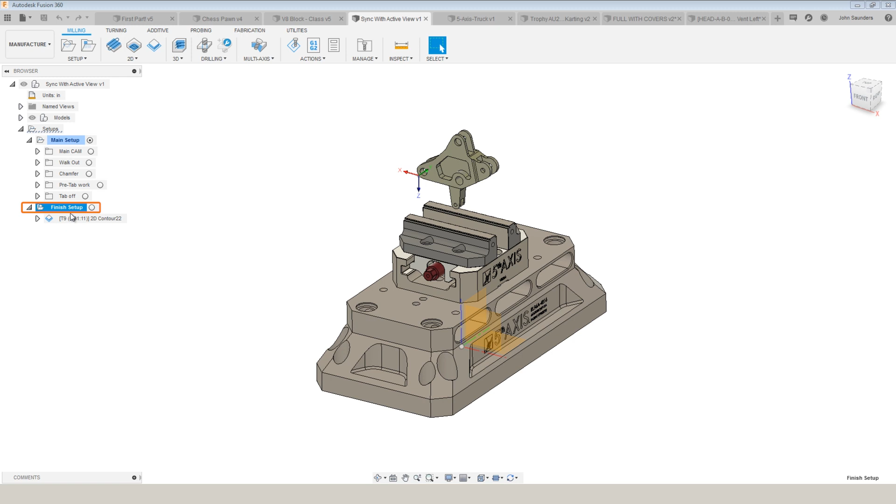Enjoy. First new feature at the bottom of your screen in the manufacture workspace is a new icon, Synchronize Active Setup. I've got both of these options checked: Sync View with Active Setup and Sync Visibility with Active Setup. What that does is when I switch my main setup to this alternate setup where I'm Op2-ing the part, and oftentimes you're inverting your Z-axis because you're holding it from the exact opposite direction. Watch what happens. Hit Activate.

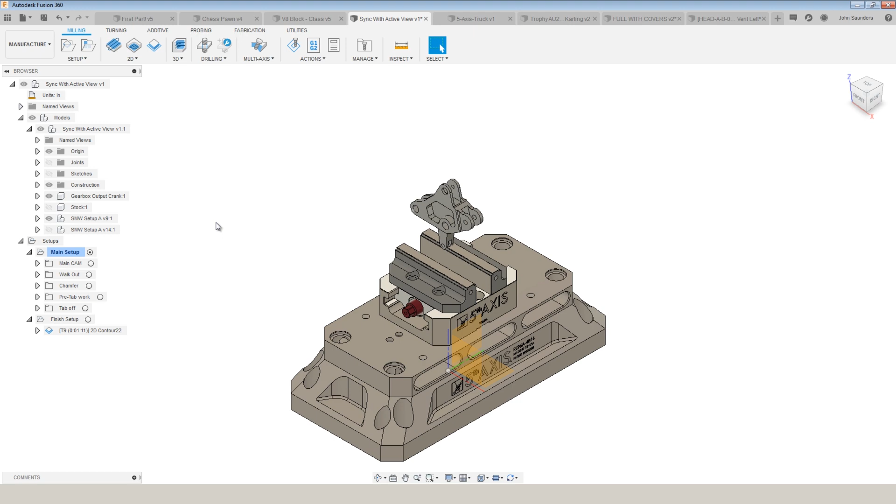It flips the part around so it's oriented now with my Z up in that ISO view, and it has toggled the visibility to show my Op2 work holding. If I toggle back to the main setup, it goes back to there. Absolutely awesome. This is a nice quality of life improvement when it comes to either switching between Op1 and Op2 type setups, or if you've got a part that you're moving through, say turning, then over to milling or machining.

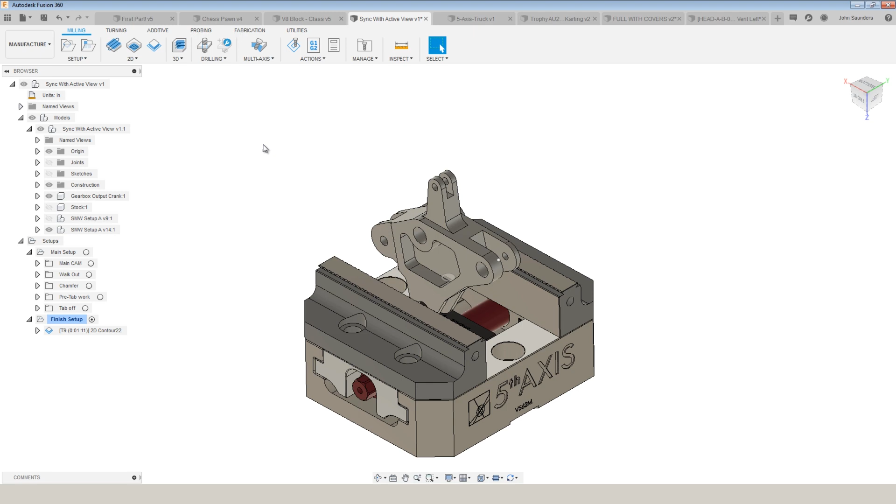Rob's class also covered a really innovative way of handling your Fusion 360 templates, but not the templates you're thinking of, in overall setups. Let's first walk through how we've handled our 5-axis setups, then I'm going to show you Rob's, and we're going to kind of compare and contrast them. So let's say I want to machine this part.

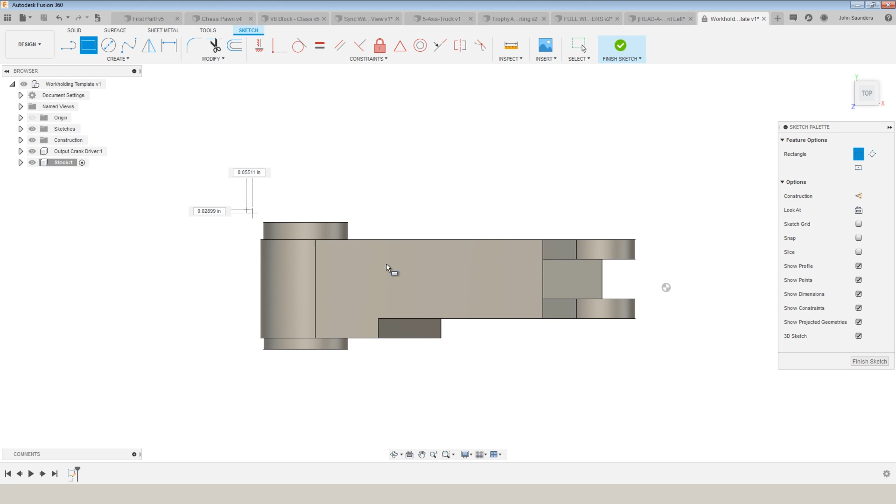First thing I'm going to do is new component, stock, R for rectangle. We'll sketch a rectangle on this face, and I would probably take more time to dimension it such that it matches stock that we have on hand. I'll extrude it up, and then I'll switch the direction to two sides. I'll extrude it down. I click OK, and what I can now do is change the opacity to 30%. This lets me see how the part is sitting inside the stock.

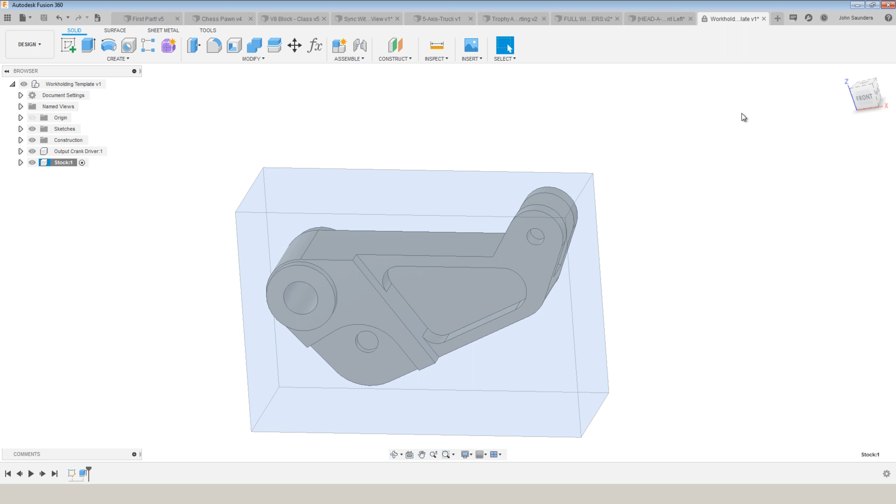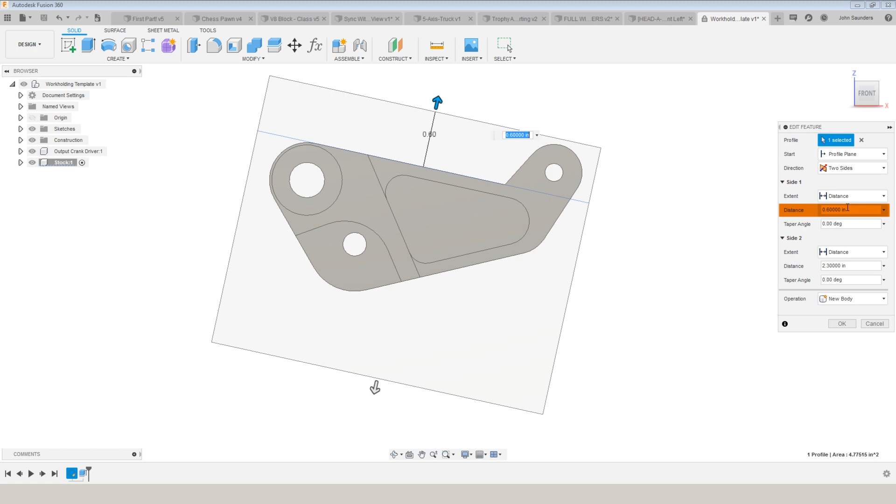And on most 5-axis workflows, especially for one-off parts, you'll benefit from having an additional amount of stock below the part so that you can tab it off and have an ample clearance below your vise. So let's say drag this down a little bit more, and we really don't need very much material up there. So you can see I'm only able to drag it in 0.1 inch increments. So by dragging it, I can see which dimension it is, and I can either type in the dimension, or if you zoom in, Fusion actually is zoom aware. So as you zoom in, it gives you finer adjustment ranges. So 0.55 is perfect for there.

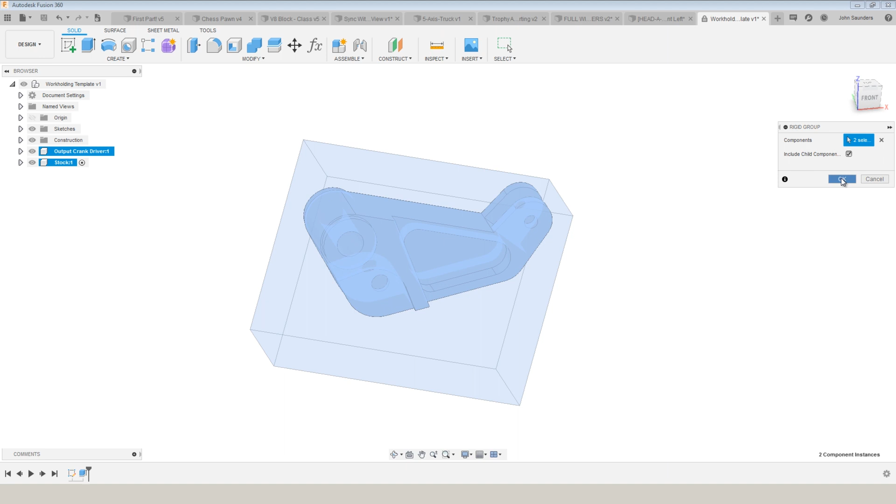Click OK. We have our part, we have our stock. I want to lock them together. Assemble, rigid group. I'll pick the component and the stock, click OK. So those now move together. I then go into our work holding folder. Make sure I'm active on my top component. I'll pick whichever setup that we have. This will be our standard smaller self-centering vise.

Insert into design. We've got these files available over on the NYC CNC website.

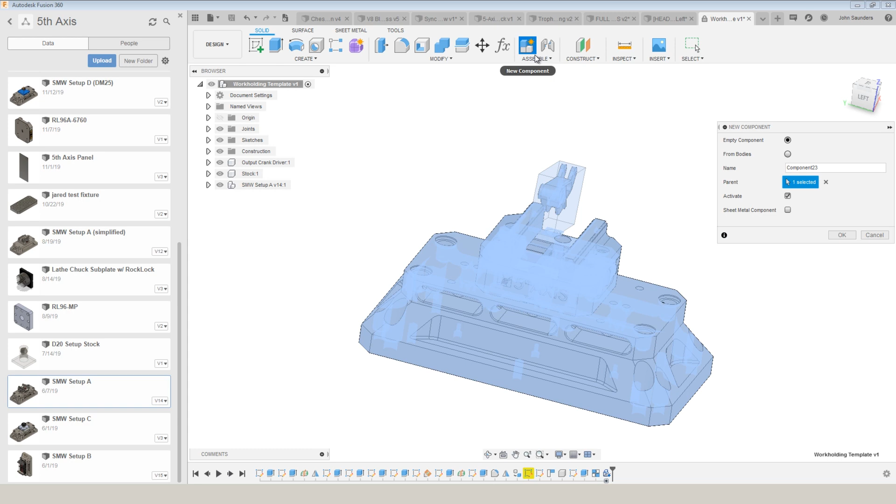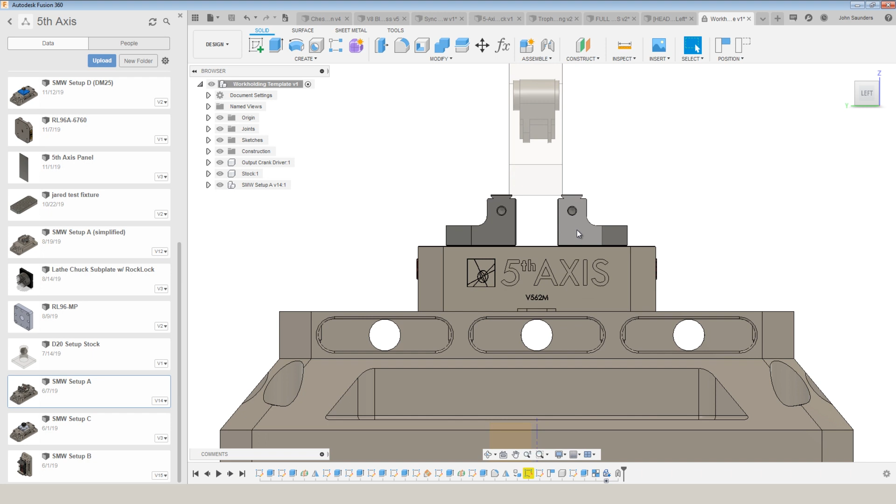Just click OK. Assemble, as-built joint. I want to join the bottom of my 5th-axis base to the origin of my Fusion model. Click OK. Think of that like a ground. I'm locking this base at the center of my global coordinate system, and having it grounded lets us move the jaws in and out. If I hadn't grounded it, when I try to move the jaws, I'm just going to drag the whole part around.

J for joint, and I'm going to then select the origin coin at the bottom of my stock and that joint origin that we have at the center of our self-centering vise. Click OK.

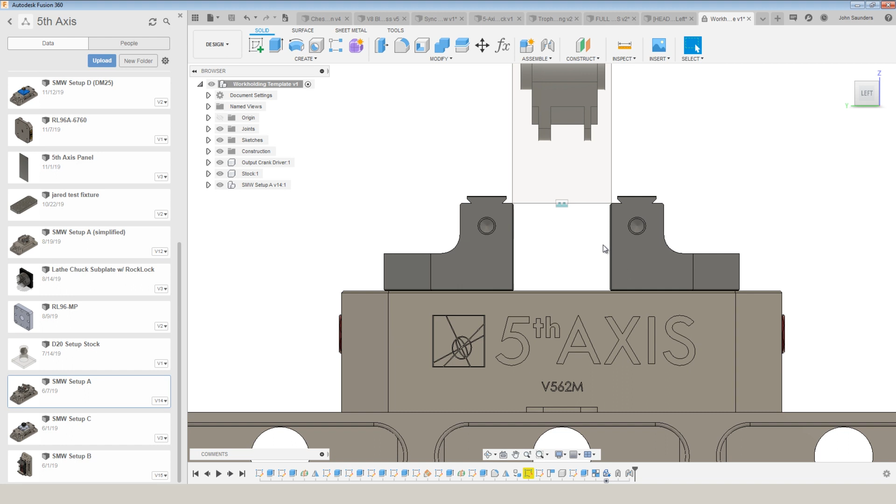Drag my jaws in. I just do this part by eyeball. And for the first time in the history of using Fusion 360, I actually care about capturing the position. And I now have my part held exactly where I want it at a known location. I could take advantage of the fact that this is a zero-point system, so I wouldn't even have to probe if I didn't want to. And I've got everything ready to go, and I can even use this to check my holder collisions with my part.

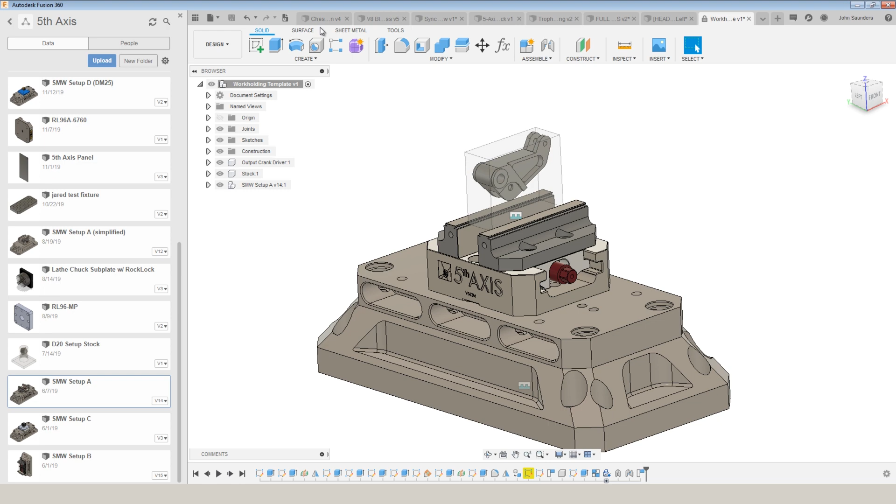Rob's method is totally different than that, and I actually really like it. His demonstration was on a 5-axis part. I'm actually integrating it already with our lathe workflows for our new ST20Y. So we have a lathe master template. And if I open up that template, it has our Royal chuck, it has a piece of stock and it has a part placeholder component. This is key. I'll explain in a second.

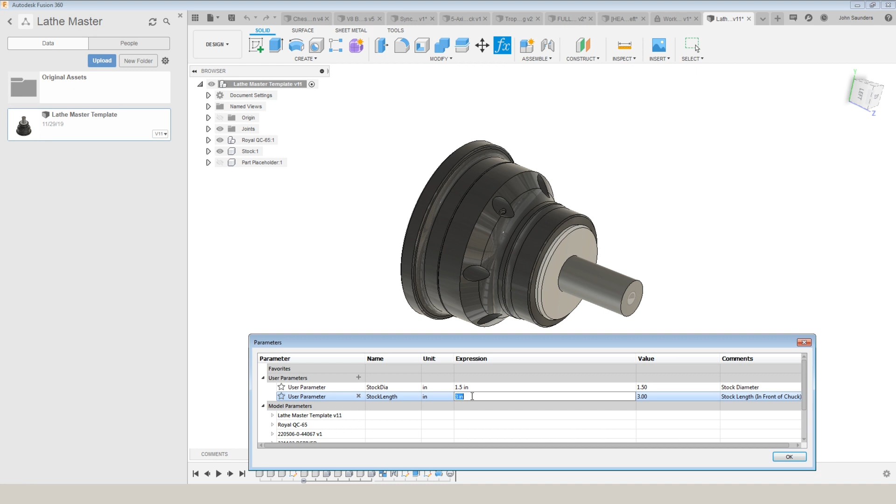Under modify, change parameters. See how that's the FX? I chose to pin that to the toolbar so that it stays up here because I use it a lot now. We've got the two variables I care about. In this case, the stock diameter, so let's adjust that to say 1.5, and the stock length, that's how far it's sticking outside of the collet. So 3 I think worked for this example.

We also have, under manufacture space, pre-programmed CAM. And this is the key to this workflow. And I give Rob a lot of credit for coming up with this.

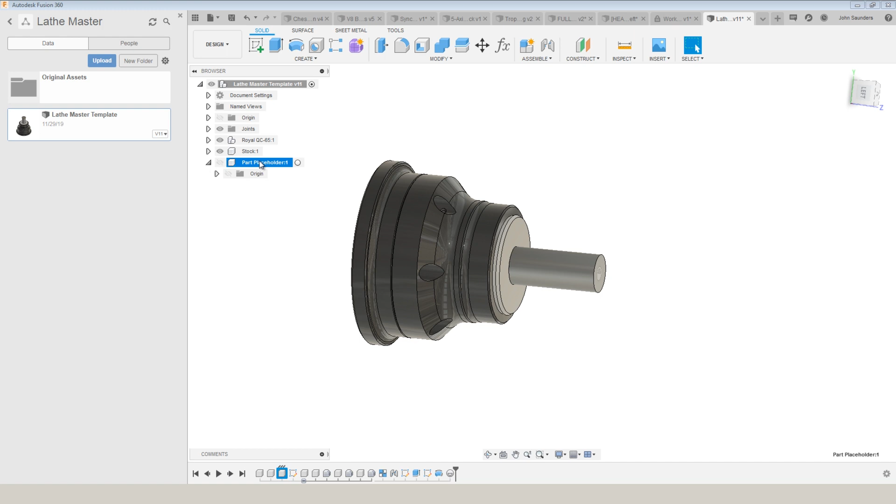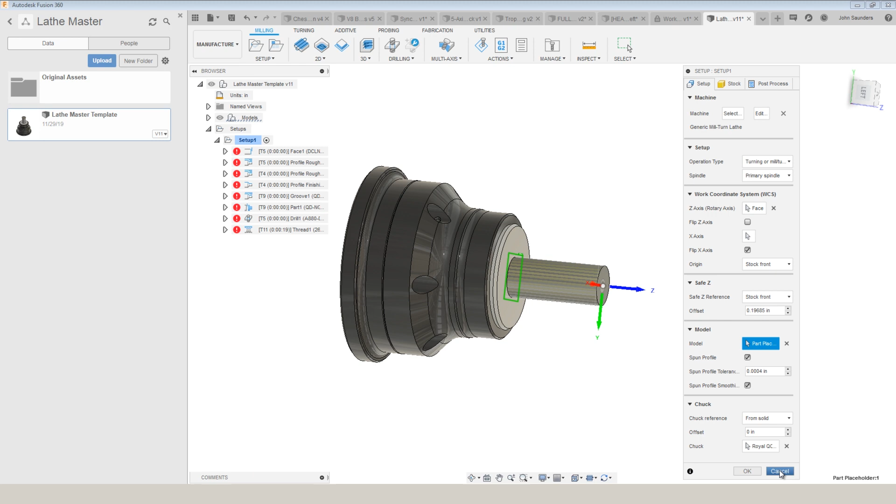I'm going to reiterate that point to make sure it sinks in. We create a component called part placeholder. We then choose that part placeholder component in our CAM setup as the model. What that means is that anything that we put inside of that component or as a subcomponent automatically becomes part of the CAM setup model. If we didn't do this, we'd have to be constantly deleting and adding new top level components, and we'd thus have to go into our CAM setup and be re-picking the model component each time.

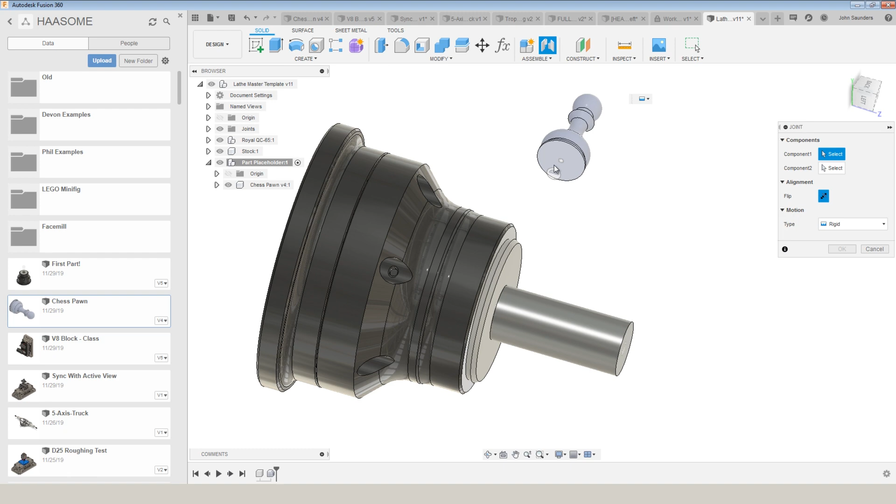I'll give you an example. Let's say we want to machine this chess pawn. Under design, I'm going to activate my part placeholder component, right click, insert, hit J for joint. Normally I'd like to grab the tip of the part. I don't have a good joint origin. That's okay, I'll use the rear end of it. Because now I can just drag it back to show it there. I set my stock opacity to 30 so I can see it.

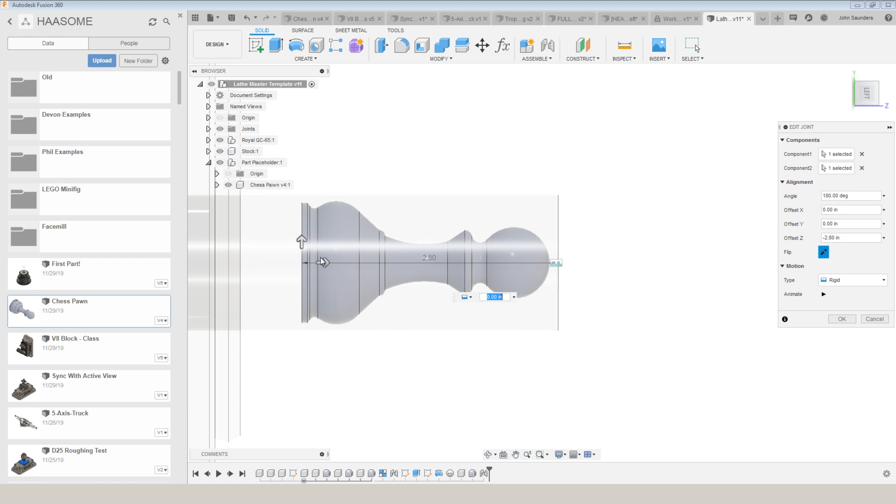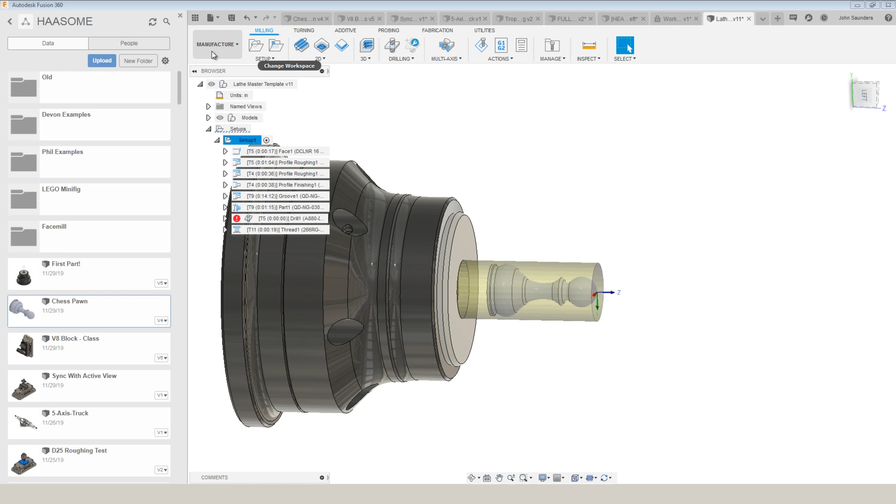I can go back and edit that joint, move it forward just so we have enough to skim off the top. Click OK. If we needed to change our stock size or stick out here, we could. Go into manufacture, right click, generate toolpath. Turning is actually a great example for this workflow because most of the turning CAM in Fusion 360 is model aware.

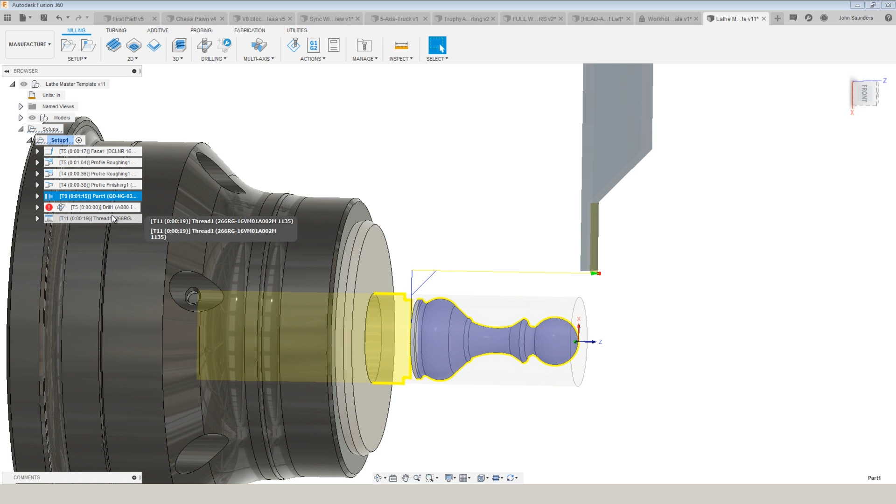I've already got my facing operation. I've got my roughing. I've got my roughing with a V insert. I've got my finishing. Grooving, I probably won't need. I don't have that selected as rest machining right now. We're still working on our master CAM template, but I won't need grooving here, so I can just delete it. Parting is good to go. I'm not using a drill and I'm not threading on this part. I am potentially done. And again, once we nail down our tooling and our feeds and speeds for our lathe, we can have this master template that works great, especially on these simple 2-axis lathe parts.

Speaking of 5-axis workflows, Phil Buttersworth did an amazing class on showing how to program 5-axis parts very quickly.

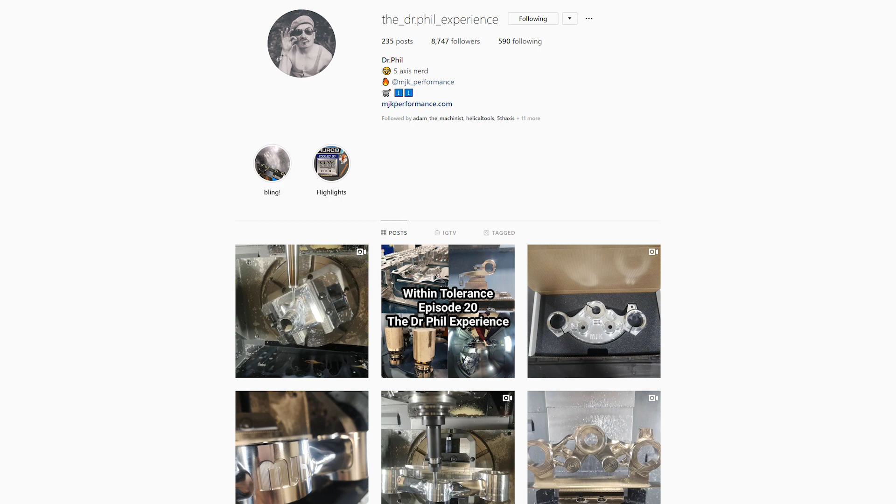Like, part shows up and within 2 to 3 hours, you're holding the finished machine part in your hand. So he asked for a sample part off of the Johnny 5, and I thought, you know what? I'd love to see how Phil would tackle this part right here. It's a fairly complicated part that will definitely benefit from a 5-axis workflow.

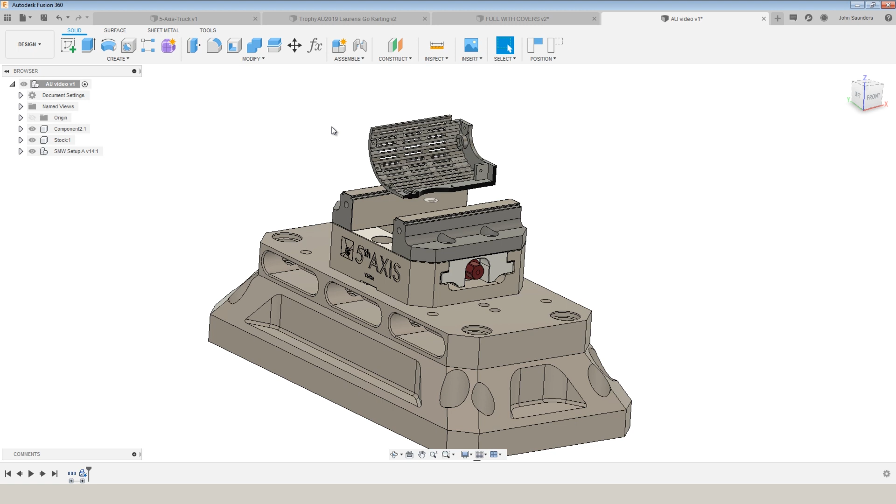Here's what blew me away: when I was thinking about machining this part, I was thinking about the traditional setups. The stock that we're starting with is almost certainly going to be 4-sided. So I'm sitting here thinking, do I hold it like this? Or should I rotate it up and hold it like this? When I hold it like that, I may not be able to have great access to get to some of these features down here on the floor, depending on where I'm trying to reach in. But if I had gone the other way, it's not ideal.

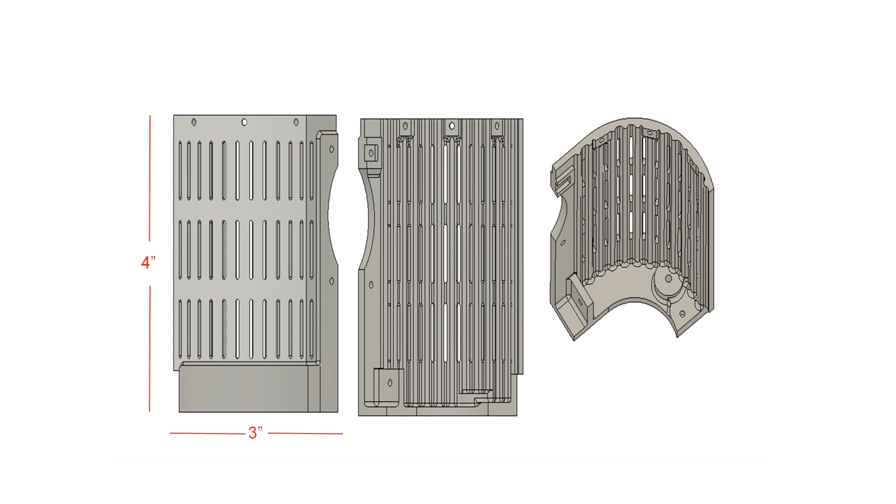And the light bulb moment in Phil's class was when I realized you don't have to hold it in a traditional 90-degree angle. What Phil recommended was rotating it up about 45 degrees, like you see here, which is going to give us the right mix to get access to all the features that we need to, including, critically, this bottom feature here with the curve, which is the most soft jaw friendly, because we still need an Op2. It's not very much work in Op2, but we want a good datum and a way to hold that.

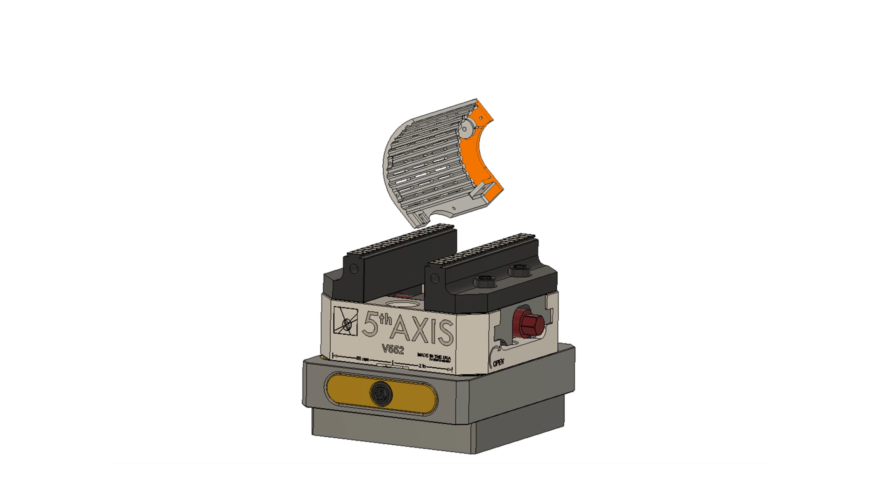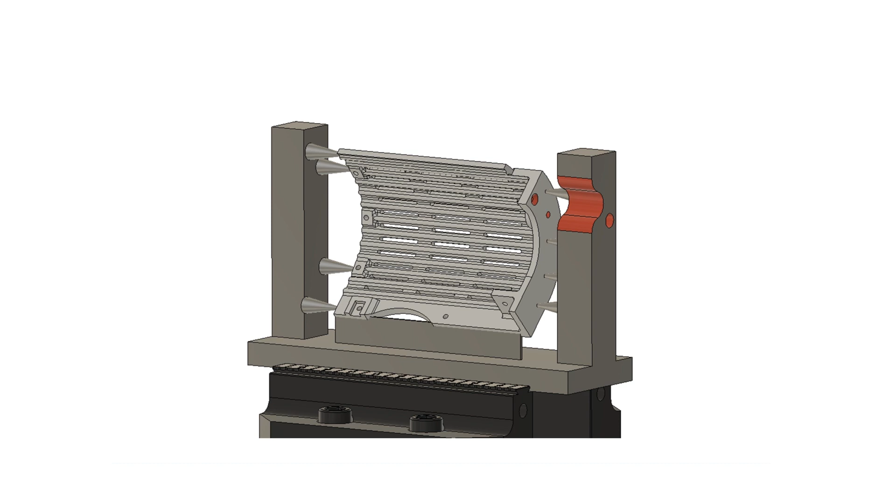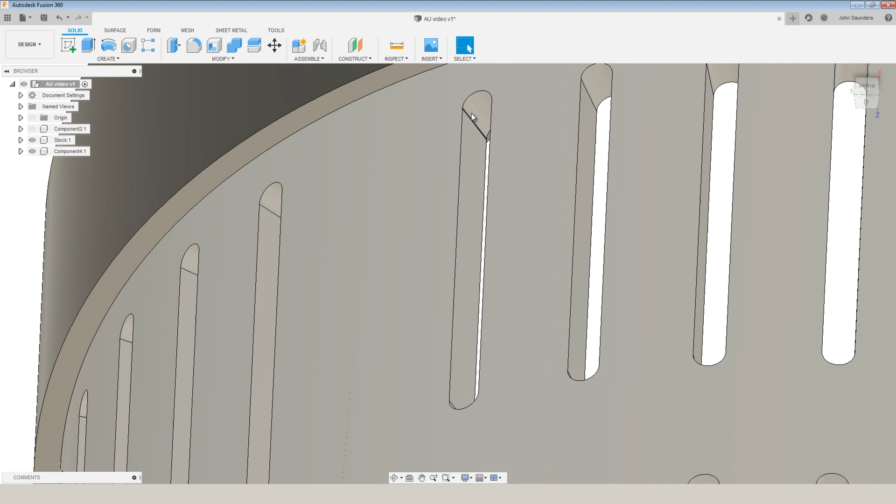I forgot to mention, let's say you're going to surface this outside edge. You don't want all these slots here. It's going to just wreak havoc on your toolpath. There's a couple different ways we could tackle this. We could copy and paste new, and we could go into this new component and we could start using direct modeling features to go through and individually delete each insert. Fusion Direct Modeling is actually really quite powerful, and this is a really good outcome, but it's a horrible way to get there because it's incredibly tedious.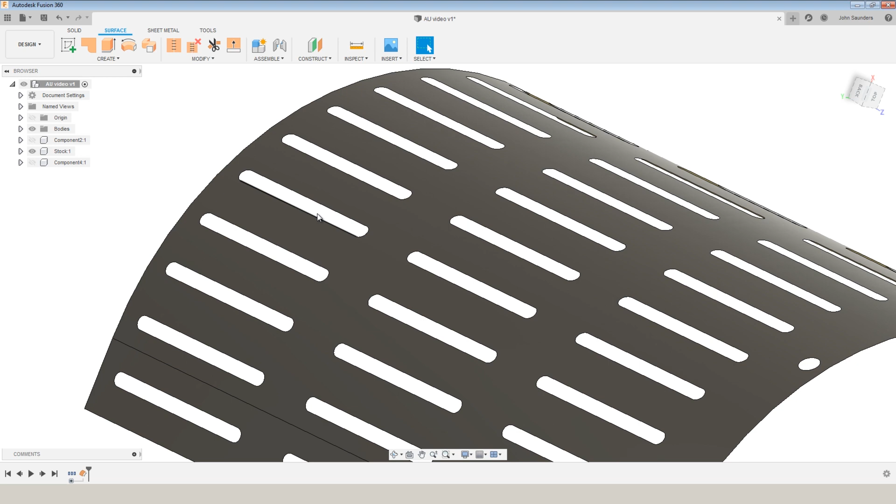And it's the same shortcoming if you went into the surface environment and you did a create offset patch, you selected that face, and you did a zero distance offset. It's a really common workflow. Here we've created that skin or that patch that we can use, but I've still got to go through and take the time to get rid of each one of these slots.

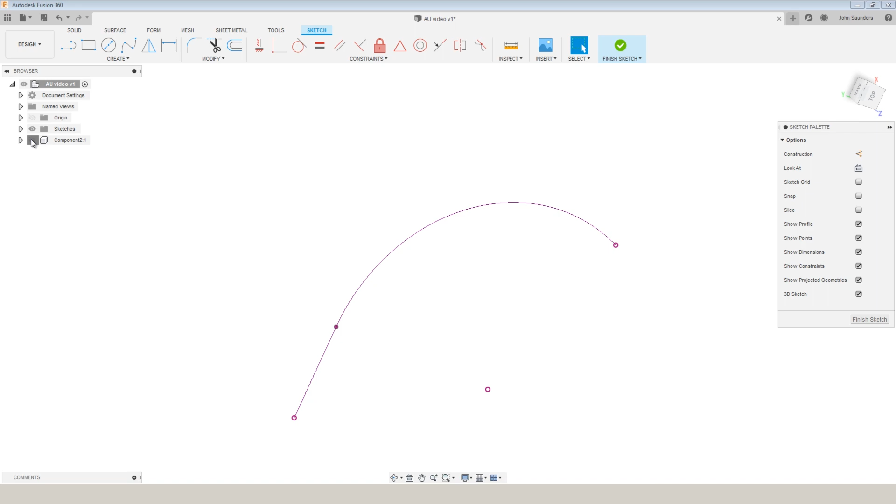The better way: create sketch on this face, P for project. Now I'm going to project those two edges. If I turn off my component visibility, you can see I've got those two purple edges, and then create extrude to object, extrude to that point right there, click OK. I've now created something much simpler. We can then do create offset, and we can select these with zero distance offsets, click OK. And you can do additional trimming work as needed, but it's a much more enjoyable way to create a nice, clean surface to use for those 3-axis toolpaths.

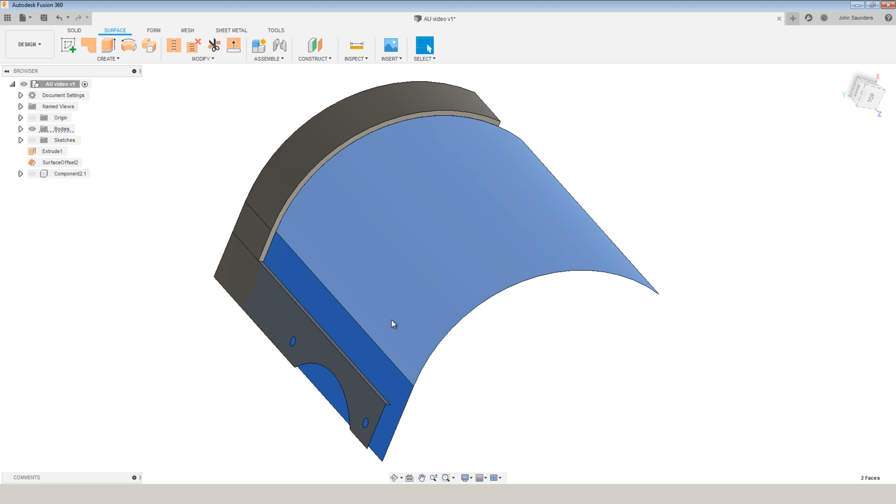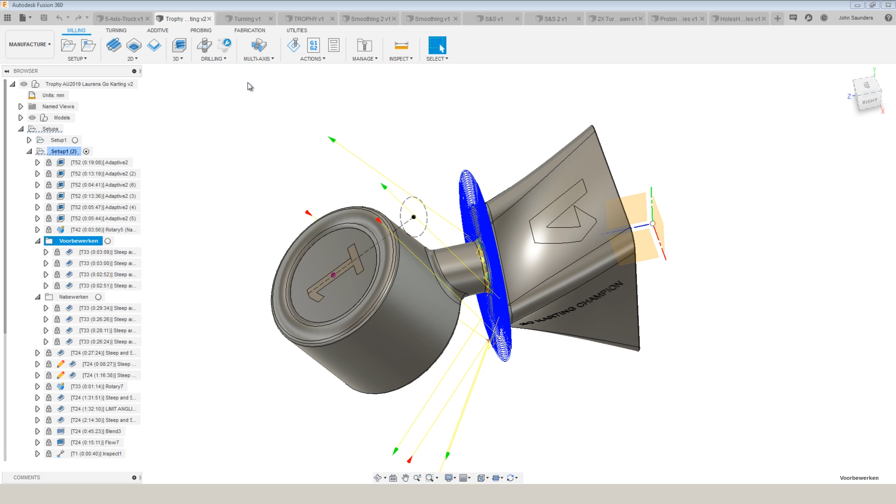Laurens Weinschenk, who you may remember from a really awesome factory tour we did over in the Netherlands, did a class that kind of recapped all the new things that have come about in Fusion 360 since the last Autodesk University, or basically in 2019. NC Programs is a major one. If you've ever gone through a part and thought, well, setup A, I want to post on my ST-20Y, but a different setup or even a different part defaults back to that same machine, and you're thinking, wait a minute here, no, I want that to be on a different style machine or use a different post processor.

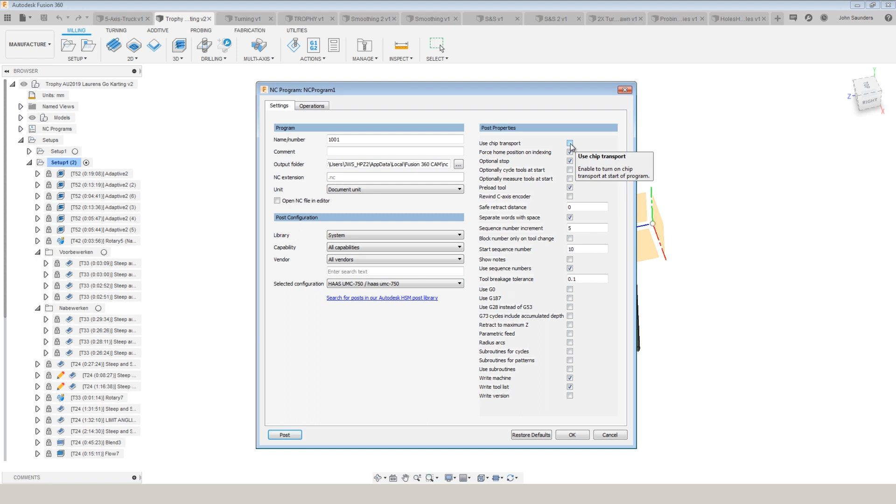More so, there's other things that you'd like to include as defaults. NC Program does that. In this example, we can save the name, we can save where it's going to get saved to, and most importantly, we can choose our default post processor for this file. We can save all of our post processor settings. We can even set different NC programs to post different sections of the code.

So you can have an NC program to run your fixturing. You could have an NC program just to run this certain Op1 setups or just the surfacing setups. You then post from this, and it saves you a lot of right clicks, double checking settings, having to make sure you've got the right post selected.

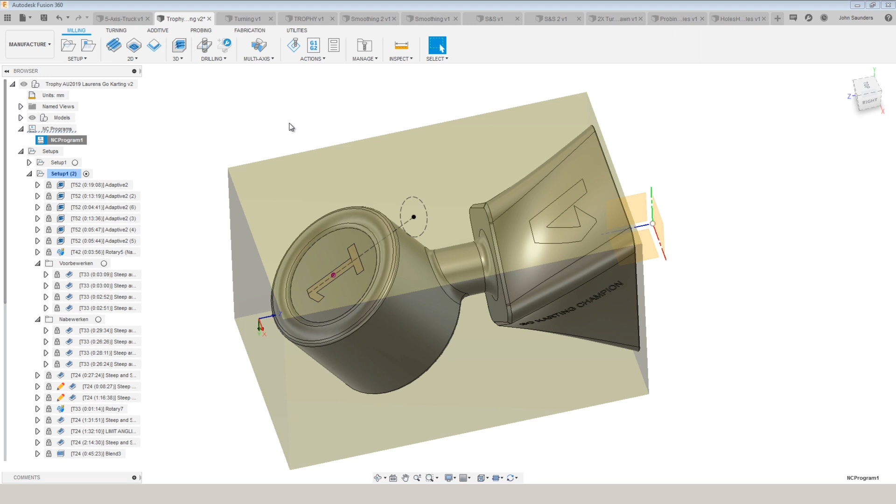Laurens made this gorgeous 5-axis trophy for the AU Go-Karting Challenge winner. Shout out to the New Zealand folks, Scott and Gavin in particular, who delivered some pretty impressive results. More to come on New Zealanders doing crazy things later in this video.

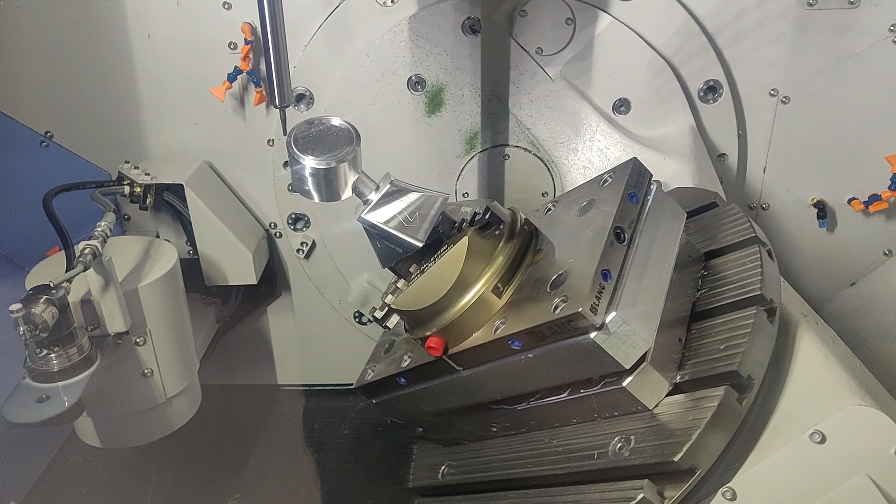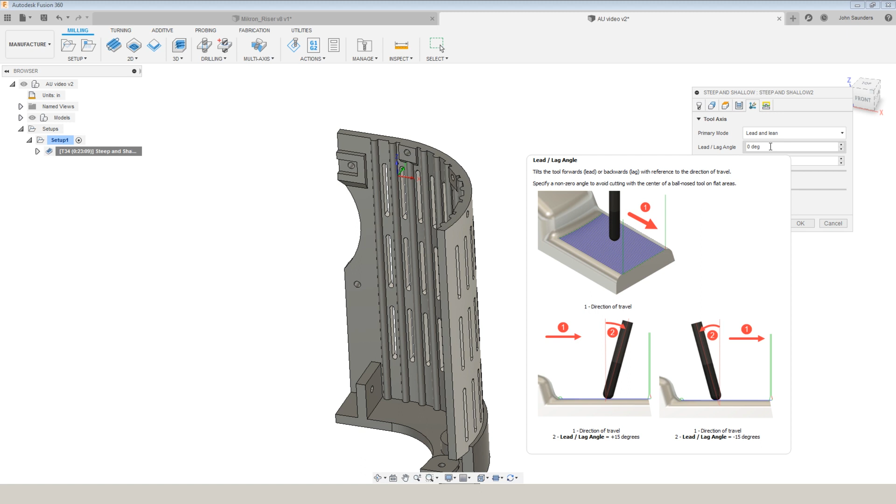It's worth seeing him go into detail about what the settings do between steep and between shallow, and what's really cool is Steep and Shallow offers a multi-axis mode that's going to allow this toolpath to work on 5-axis machines. It's the closest thing yet to a single toolpath that can cover a lot of different geometries and be that kind of holy grail for a lot of toolpaths, at least where a projected toolpath will still work, meaning from a certain view, you can see all the geometry you want to hit.

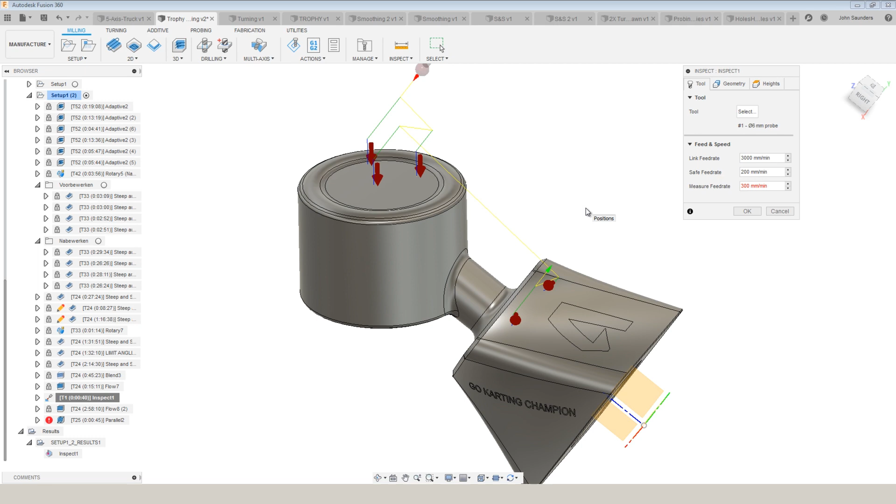The other thing that Laurens covered in his class that was really cool was he showed how we can use the new inspect function under the extensions. So after this part has been machined, he's bringing in his Renishaw probe, and he's picking 5 points. You just pick as many points as you want. He's probing those points. Then the machine can actually output a file. He can bring that back in. And in this case, the green points were in spec, the red were out.

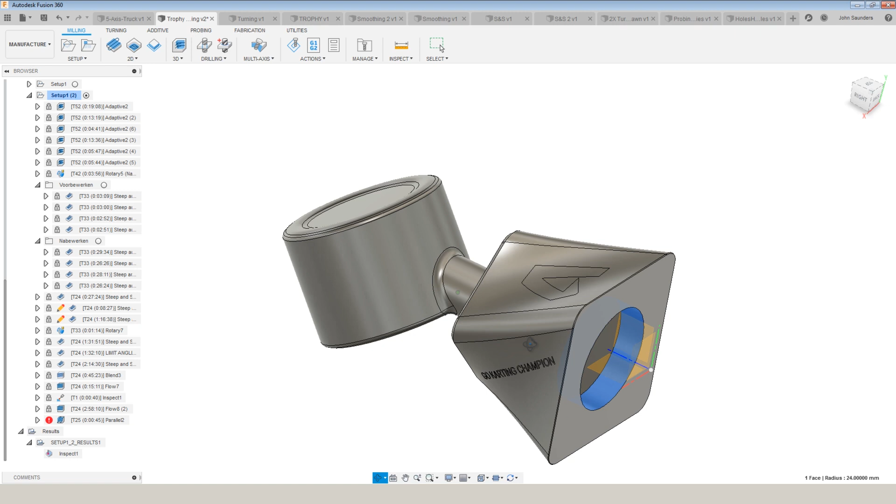He intentionally did this by incorrectly orienting the part on his Op2 fixture in the machine to show what that can do for you. Once that happens, there's some pretty cool things you can do where you can tell Fusion to go ahead and update a tool wear offset to remachine it, or to use logic to say, well, if it's out of spec, run an additional separate toolpath.

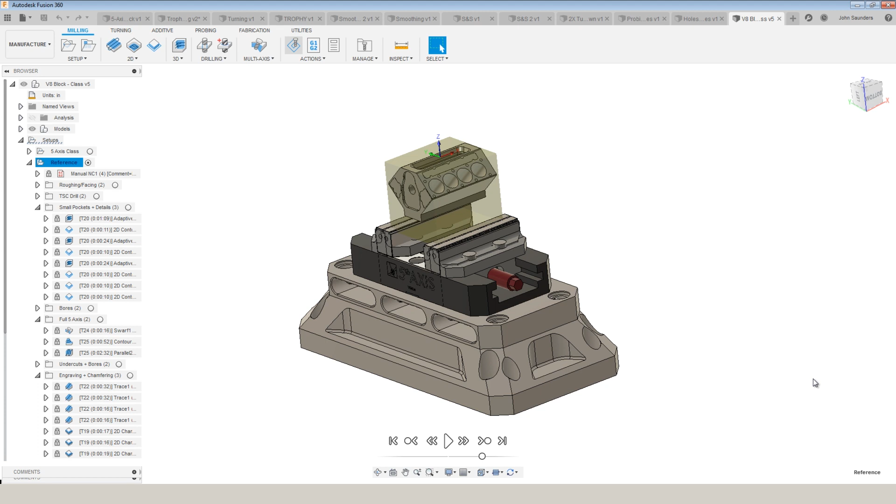Two of my favorite things that I learned about in 2019 were, number one, under the simulation, switch your colorization to comparison and then set the tolerance at whatever tolerance you'd like. This gives you red, green, and blue output to show where you either have stock remaining, which is blue, or red, which would be gouge.

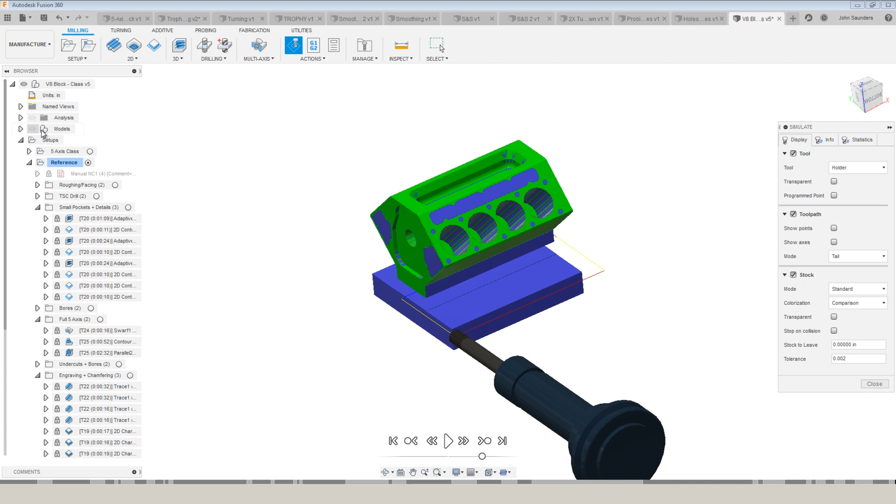If you do this, make sure you at some point toggle off your model visibility, because if you do have a gouge, it will be shown in red, but if you have your solid model still visible, there's a chance that solid model will cover up that red gouge.

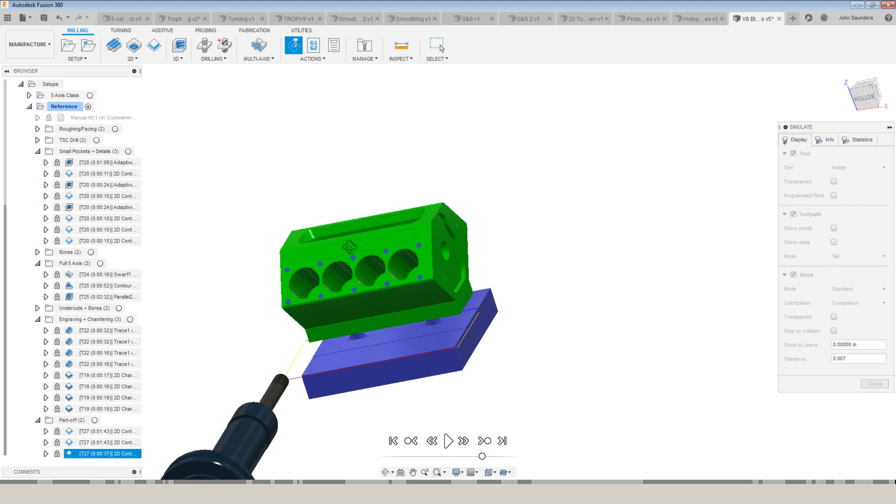It's great for all CAM, but it's really useful for things like 5-axis CAM, where you've got a lot of different setups and orientations, and there's a chance after programming dozens of operations, you might have just missed something, or you've got an incorrect setting in your toolpath. We use this now on every single part we do.

The other feature is under Inspect, Section Analysis. It is awesome for giving you a much clearer view when you're trying to look at certain toolpaths. I'm going to pick this face here, and this doesn't change my file, it just changes my view.

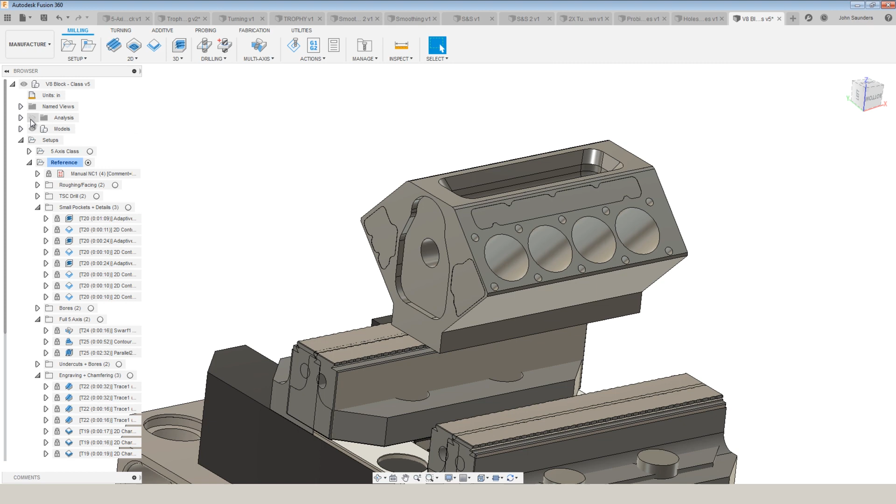And for example, let's say I want to see, turn that back on, I want to see what's happening at the bottom of these cylinders. Well, if I now hop into my bore toolpath, I can get a much better look at how that toolpath is moving and acting at the bottom of that bore, even with my toolpath simulation on.

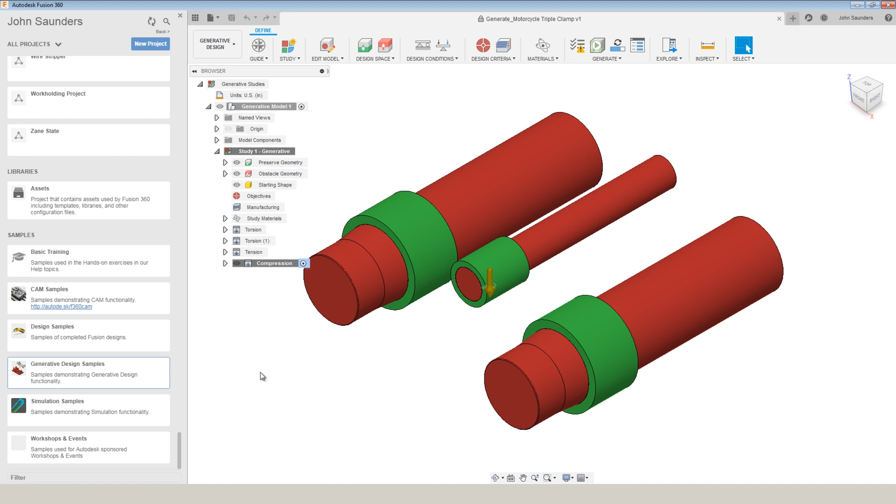Generative design was a huge push at AU, and it's pretty cool. If you've never heard of it, what generative design does is it builds your CAD model for you. That's right, folks. Skynet has arrived. In Fusion 360, you have access to generative design samples, and we've got the motorcycle triple clamp open here.

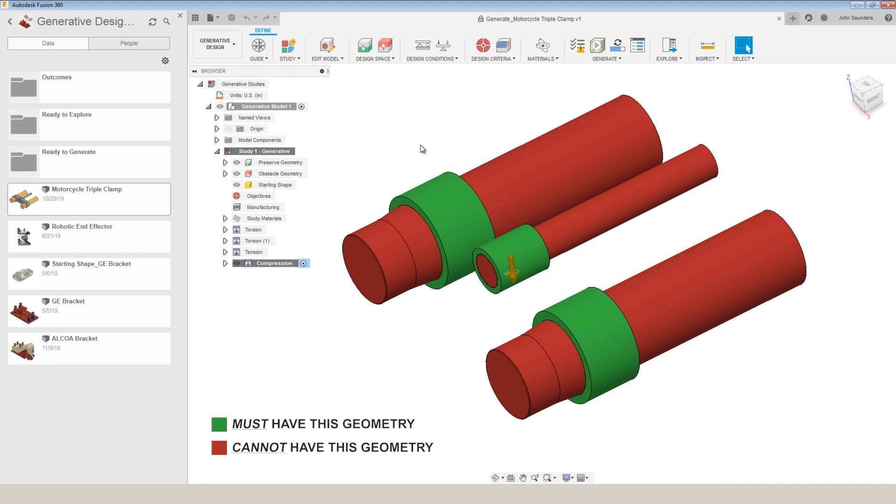What's up with this red and the green? Well, the red represents exclusion zones for the new design. And sometimes that means you've got to extend it so that, for example, it doesn't preclude you from having access as you install the part or service it, say, with a screwdriver or tool. Then the green represents geometry that you absolutely need to have. So here, where our triple tree will actually interface with the motorcycle. So we've got that green geometry they call preserve, the red called obstacle geometry.

You tell it what sort of materials you're going to use, which is really important, because what generative design is doing is it's making use of the strength of those material properties, everything from plastics up to things like Inconel, and then we have to tell Fusion how it's being used. So here we've got a few different torsion load constraints to tell it how I need to design this part to have it meet the design requirements, including the factor of safety.

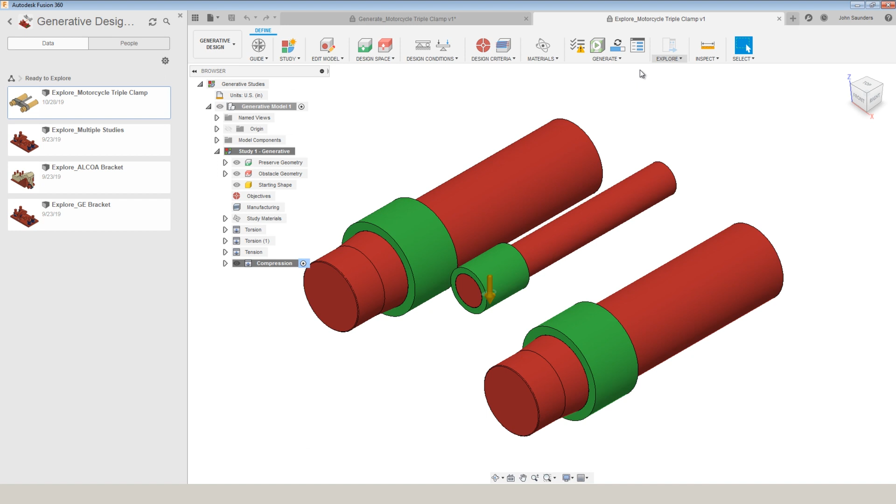After you hit generate, it goes off to the supercomputers and does its work. And what comes back is absolutely amazing. Again, nobody created these models. The computer created these. The first time I ever heard about generative design was back when Autodesk was using it in the context of software called Dreamcatcher.

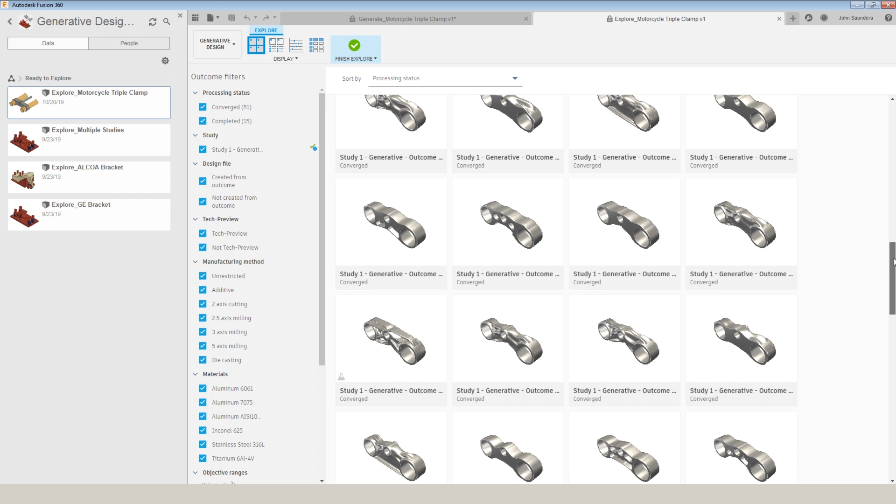And they had software that read the Formula One rulebook, and based on its own interpretation of the rulebook, was able to build the, at the time, new safety roll cages for a Formula One car. Nobody was involved. It figured it out on its own, and the outcome gives you hundreds, if not thousands, of options. Some of them are horrible. Some of them are pretty beautiful. Many of them are often a very organic shape or organic look. What's even cooler, though, is that you can adjust these outcomes based on your capability, whether you're going to print the part, machine it, casting, and so forth.

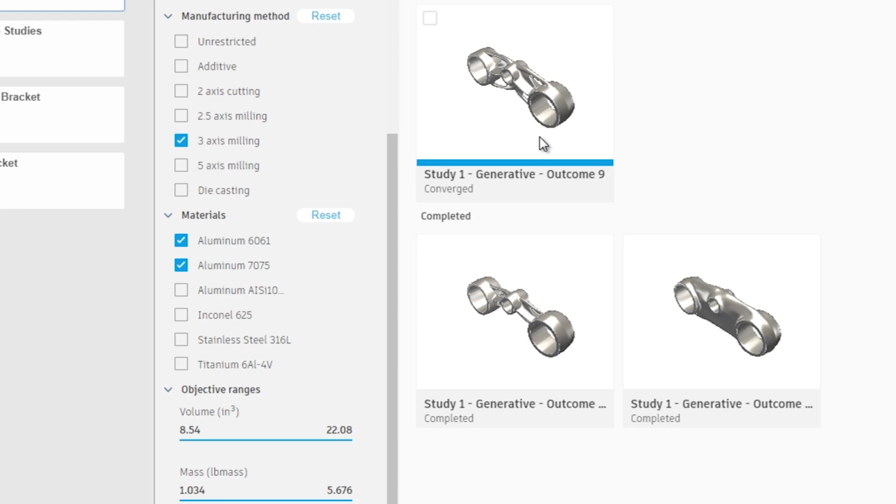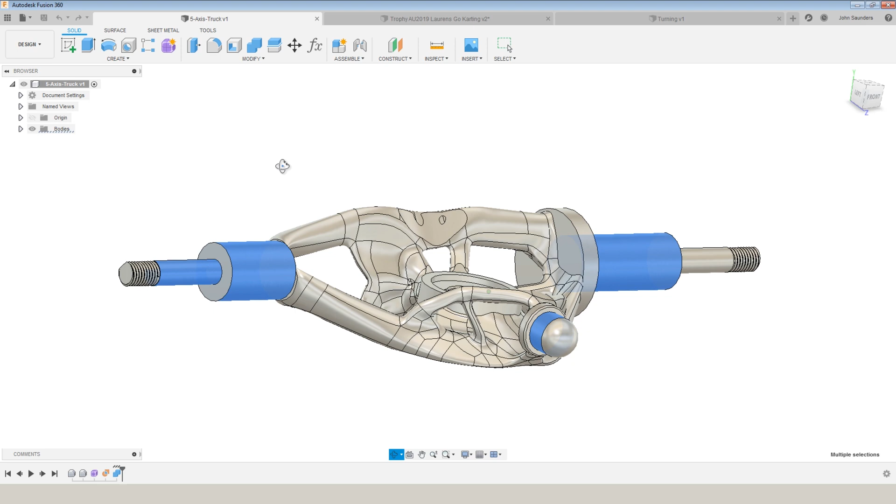This is a truck for one of the Datron longboards. And Gavin Bath from New Zealand, who's behind the new post-processor startup Massive, took a stab at this generative truck design. So he literally told Fusion, okay, we've got some constraints here where we need to mount bearing blocks, and we need this solid object here, we've got a shaft through it. Otherwise, here's how much a person weighs, here's the kind of forces that are going to be applied. Oh, and we need this fitting here. Go ahead and build the geometry that's going to support that, subject to whatever constraints I want.

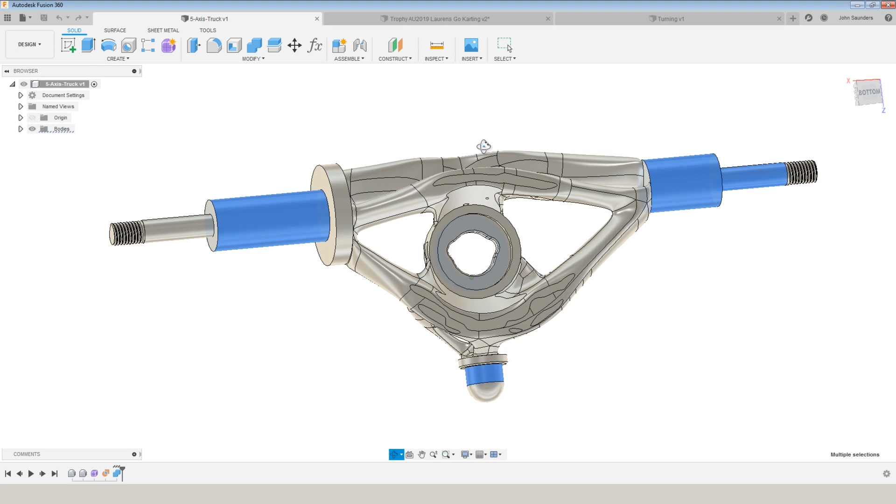Let's say I want to have it die cast, or I want to do it on a 3-axis machine, or in this case, we're going to try to do a 5-axis machined version. This isn't the final version, but it's probably pretty close. But this is really cool because we already built a Datron longboard, video coming out on that in a few weeks. So it'll be really cool to consider swapping out one of our trucks for this 5-axis designed version.

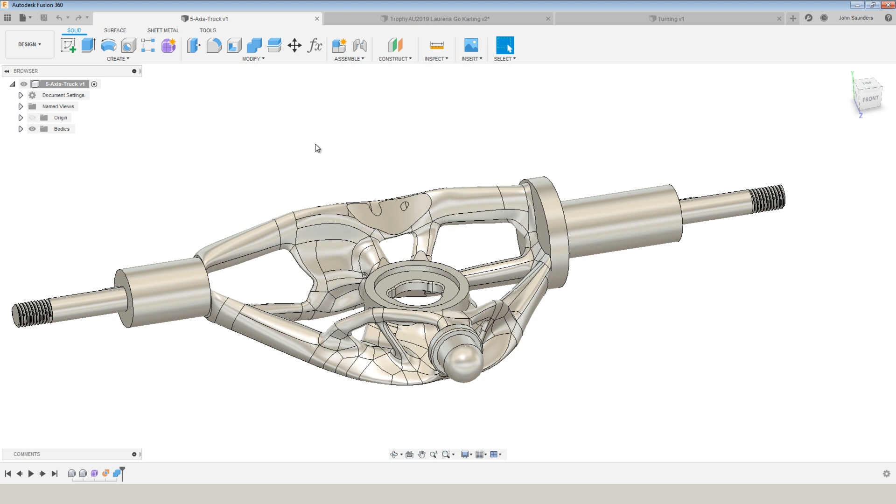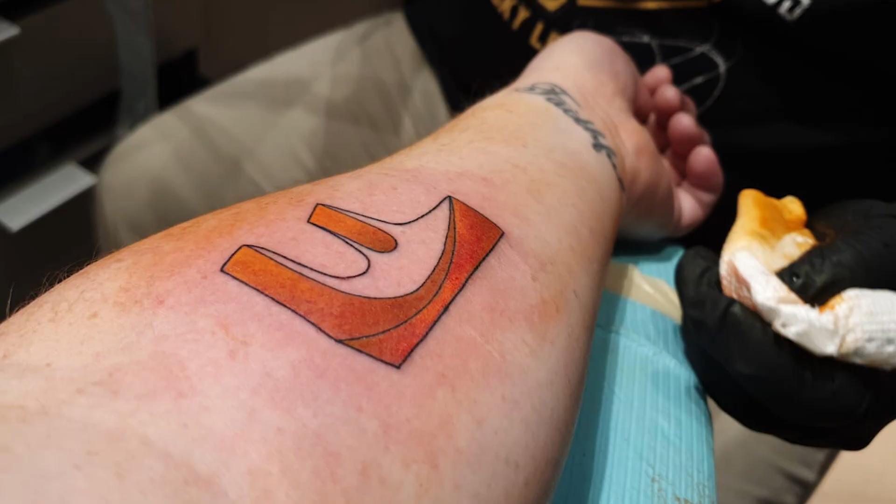But I want to wrap up with the craziest thing that happened in Las Vegas this year at AU, which was during one of the presentations, they were talking about the passion of the fans. And they showed another company where an active and passionate user had gotten a tattoo of that brand. And fast forward about 2 hours later, and Brett from Vertigo Technologies in New Zealand had a Fusion 360 tattoo on his forearm. Shout out to Brett for that kind of dedication.